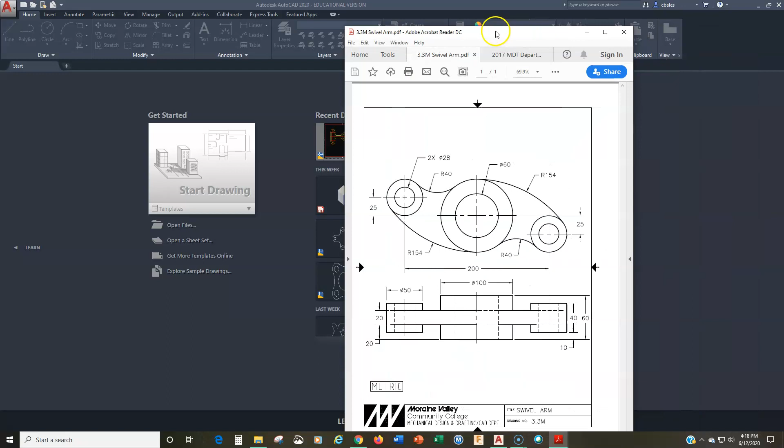Again, like the adjustable fork, we're not so much talking about a much more difficult drawing, but we're extending our capabilities with the tool set that we have. So a smattering of new commands, new techniques here.

You'll first notice that this is our first foray into an orthographic drawing. That is to say, we have two views of a single object. We have a top view, this business right here, and we have a front view, this right here. We also have some additional line types, which we're going to use layers to draw. We have hidden line types in addition to our center lines, which we looked at with the adjustable fork. Everything else is going to be pretty much routine.

I'll talk you through some of the things that you need to be prepared for in terms of creating an orthographic drawing. This is not your last orthographic drawing. In fact, all of Module 3 is all orthographic drawings because orthographic drawings are ubiquitous in engineering drawings, civil engineering drawings, architectural drawings. Just about any drawings that you're going to do in AutoCAD are going to be orthographic.

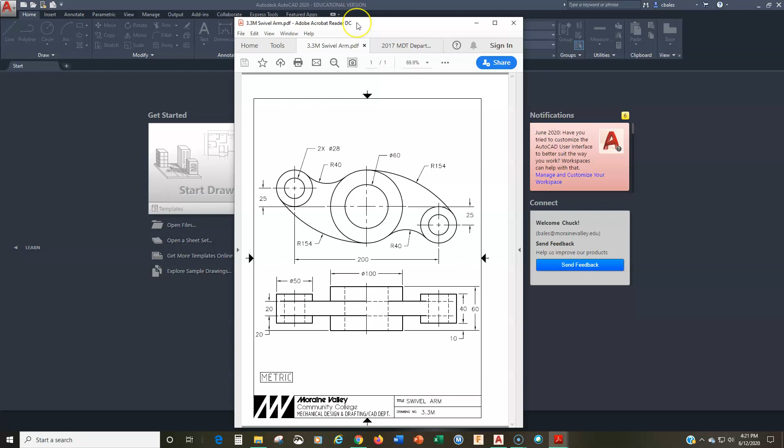Okay, so let's get into this. All right, so there's our drawing. While you're watching this, if you want to pull the drawing up, please go ahead. We're going to get started with a template again, but note this is a metric drawing, so we want to make sure that you use the metric template. All right, there we go.

So we start with the metric template. And you'll notice that down at the bottom we have a different set of layouts, right? In place of the ANSI A, ANSI B, ANSI C, now we have ISO A4, ISO A3, ISO A2. This is just the metric or European equivalent to the ANSI A, B, C, D, E. In Europe they use a different numbering or coding system for paper sizes. We'll cover all that when we get to the printing and plotting stuff.

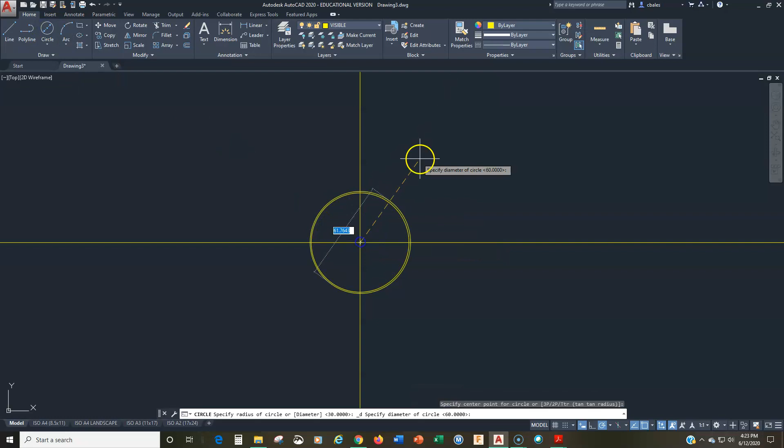So let's go ahead and get this drawing started. And I'm going to start with the construction line because, heck, it just is so perfect. I'll put that in there, just like that, hit escape. And now I want to put the main circle in there. So I'll use center diameter. We'll go like this, and we'll do a 60 diameter. Whoops, I got to zoom out a little bit. And we'll do another one with a diameter of 100. All right, so there's our main circles, main top view of the cylinder.

Some people ask, hey, which view do you get started on when you start drawing? Well, you know what? Whichever view you want to get started, it really doesn't matter. And you don't necessarily have to finish one view and then move on to the next. So you kind of have to work with the dimensions or work with the design, and just get it done.

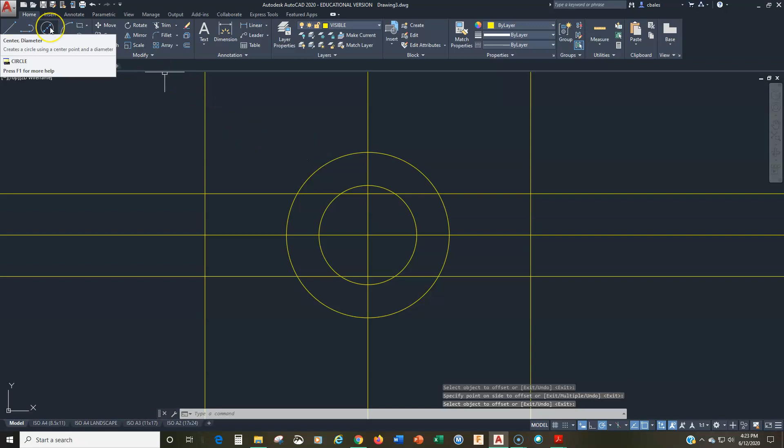I'm going to go back to the offset command, and I'm going to offset 100. I'm going to offset this line over here and this line over here, and then I'll offset 25, and then this will give us the next little bit, which is a diameter 50 and diameter 28. So we'll put a diameter of 50, spacebar, pick, spacebar, pick, and a diameter. Remember, now here's where you can get messed up. So I want to now type in 28, right? Because I'm doing the diameter 28 circle.

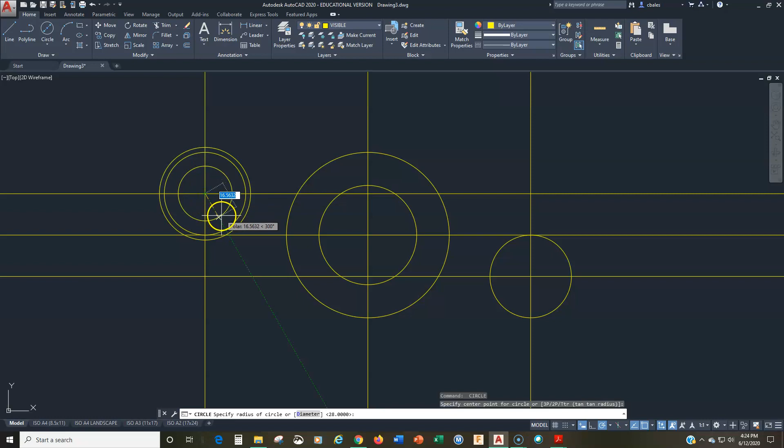What happened there? Well, what happened was I forgot that when I do the spacebar pick, it goes back to the center radius. So I typed in 28 thinking that it was the diameter, but it was asking for a radius.

Okay, so don't get caught. Oh, now I got to figure out which one it is. That's the one, it's too close to the other one. So just remember, if you do this spacebar pick spacebar kind of thing, if you're changing the diameter, you got to understand it's going to switch back to the radius option.

So now I'll ask you, how do you think we're going to get these curves in there? Let's see, we know the radius, right, and we don't know the center of any of these. So we know the radius, we don't know the center. Oh, but look, it's tangent there, and it's tangent here. So it's a tan radius, all right?

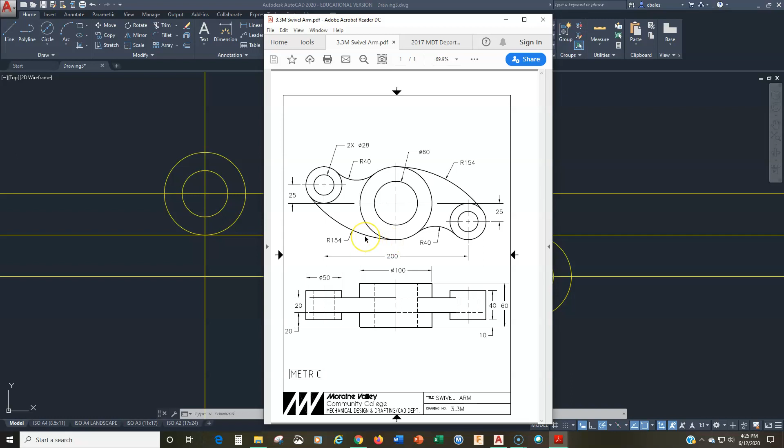So every once in a while when we're working on this drawing, somebody will get a little messed up because they choose the wrong points for tangency. Remember when we discussed the circle TTR option, I mentioned that you don't have to pick the exact tangency. You don't really know it at this point, but you need to pick in the ballpark.

So if I come over here and pick this and pick this and type in a radius of 154, it's going to curve it the opposite way. Why? Because I picked this quadrant of the circle, 1, 2, 3, 4, the fourth quadrant, when really the tangent is more over in the third quadrant.

Okay, so if you get a circle that flips on you here, don't worry about it. Just erase it, go back, and ballpark it a little bit better. All right, let's try that again. So I got to pick over here, and I got to pick over here, 154. There we go.

And let's do that again, circle TTR. So we'll pick over here, and we'll pick over here, 154. And we'll just keep doing it, here and here, 40. This gets a little bit confusing.

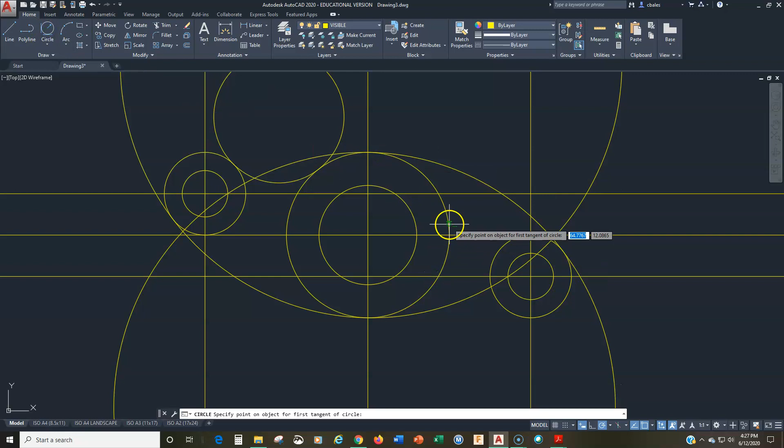So feel free to not put all 4 circles in there. Feel free to put 2 of them in there and then trim it, or even 1 in there and then trim it out and then do the other ones.

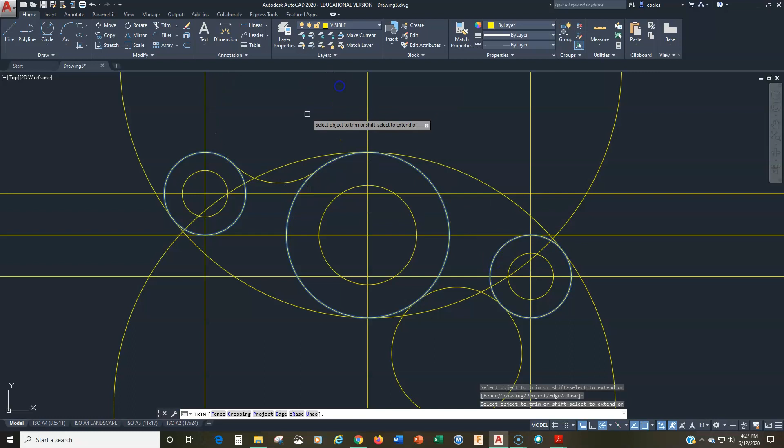So trim, I'm going to pick this circle, these 3 circles, and do some surgery there. I'm going to have to pick again, so let me erase these lines too, they're kind of in the way. And let's finish our trim.

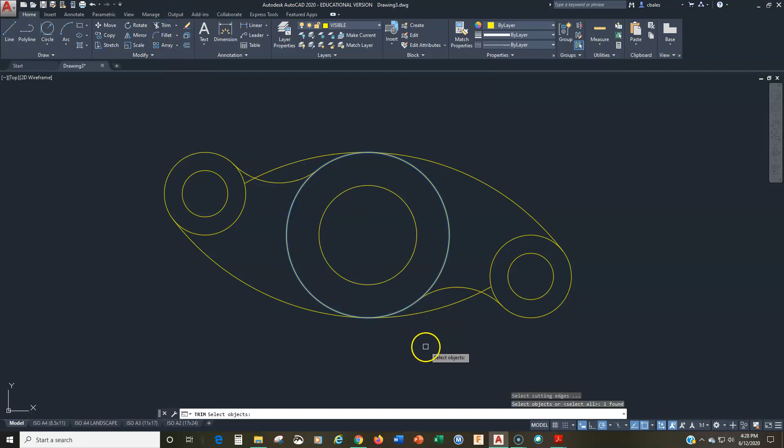There we go, awesome. All right, now at this point, I basically can go one of two ways. I can put in my center marks and center lines, or I can go ahead and finish, get started on the front view.

I think here we don't have to draw center marks right away because we can use object snap center, right? So object snap and center is on, and that's going to help me grab hold of the exact centers of circles. Okay, so let's get started on our front view.

Now sometimes what I like to do, because I like to work with a large drawing here, I will create an orthographic view that's really too close to the other views, just because I'm able to keep the size maximized, and then I'll move it. I'll do that because that'll give me an opportunity to show you the move command also.

Alrighty, so where are we going to get started? Let's draw a line, and we're also going to look at object snap tracking, or OSnap tracking. So let's see how. I'm going to go to the line command, and I'm going to pick up the center, and I'm going to come over here, and I'm going to draw straight down, and I'm going to draw across, right? And I'm going to come up.

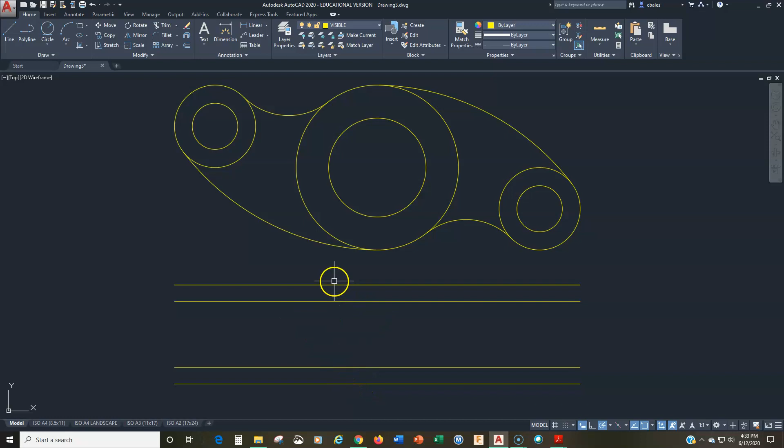All right, so we got that in there. Now I'm going to do some offsetting. So I'm going to offset 60 first, and this is the height of the large cylinder here. And I'm going to go back to offset, and offset 10. All right, hit enter or spacebar to get out of the command. Go back to the command, and I'm going to type in 40 for my new offset, and there we go. All right, so now you can see the top line here and here - those represent the bottom and top of this cylinder, and these two middle lines represent the bottom and top of these smaller cylinders on the wings.

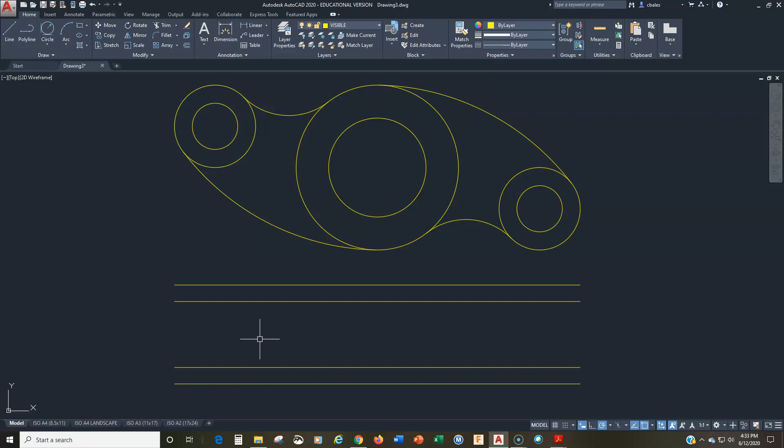So now let's get these cylinders framed in here. We can go to the line command, and I'm going to work just from left to right. I'm going to get this in there, right there. Go back to the line command, hit spacebar, and draw this one right there. The diameter of these cylinders is 50, so I can go to offset, offset 50, and offset this in and offset that in. And now let's trim - pick everything on the screen and get rid of those.

Alright, now why don't we do this? We'll use offset object snap tracking again, or OSNAP tracking again. By the way, I've said this numerous times - I'm not necessarily drawing in the fastest, most efficient manner. I'm drawing so that I can show you the most techniques. So you may have a much better way to draw, and I encourage you to strategize about that and see if you can figure out a way, or do it this slow way like I'm doing. Not that I'm doing it very slowly, but all right.

So let's do object snap tracking again. All right, so we want to frame in this cylinder right down here. So why don't we do this - watch. Line. Acquire this point. I'm not clicking. Track down. Now watch, click, click. You see how object snaps came on and really helped me out?

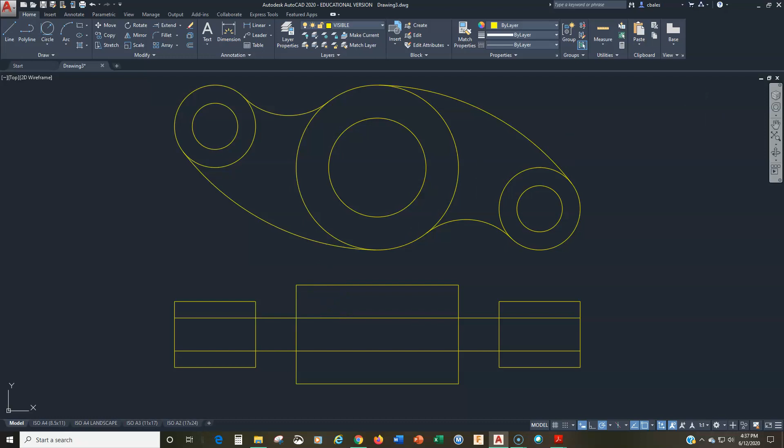All right, now what is going on over here? Okay, so let's take a gander here. This always confuses people, especially if you don't have much experience with orthographic projection.

So if I look right over here, let me see if I can blow this up a little bit. We'll go to like 100. All right.

So look in the top view. You see how this rib comes around here and it blends into the cylinder, right? So what we have is a 20 millimeter thick rib that is just going to blend right into this 40 millimeter tall cylinder.

In the front view, that's what we're seeing. This surface comes and blends right in there. So what happens is at the point of tangency, right about there, that's where this surface blends in with this surface. At that point of tangency, that's what it looks like. This line just ends, signifying that this surface comes in and blends smoothly into the cylinder.

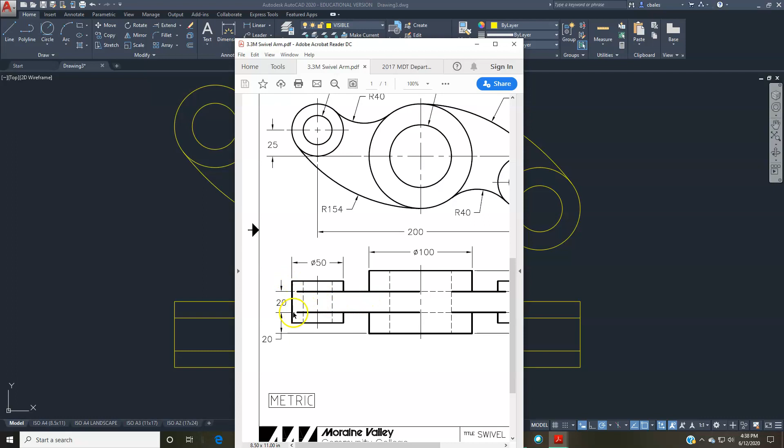So let's make that. All right, so we're going to go to the line, and I'm going to acquire this point. Now notice I get object snap intersection, right? Because that's an intersection between two curves, right?

And I'm going to track down. I'm not clicking, track down. Let's go through that one. Boom and boom. Okay, let's do that again over here.

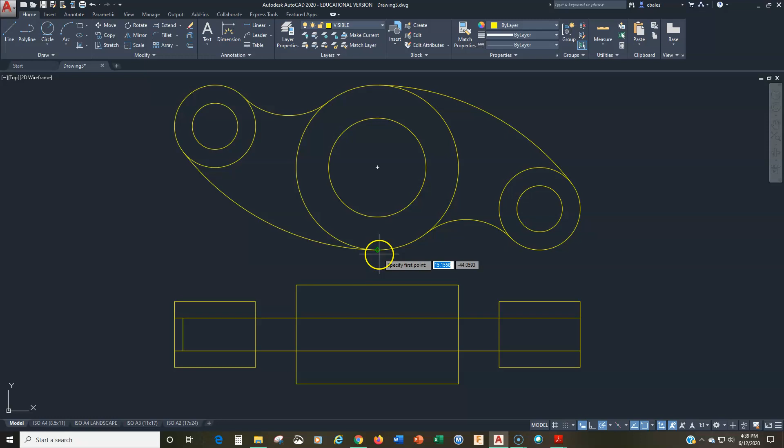Line. Now here's where you got to be careful. Look at that right there. You see what's going on? So this is a heads up here. I'm going to zoom in here. We got two things going on here.

We have the end point of this curve, right, and that's the end point or intersection. But then right here we have a quadrant. Ay, Dios mío. So we have the quadrant, in this case the 6 o'clock position on this diameter 100 circle, that's the cylinder, and not just a smidgen off is the intersection that we're looking for.

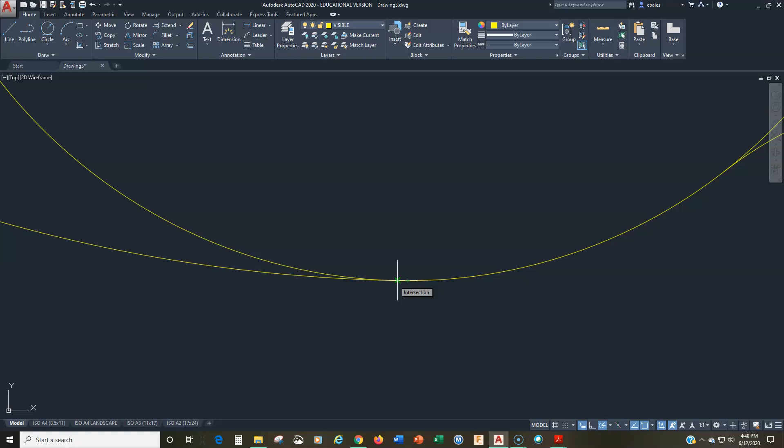Be careful with this, all right. I will be looking for this in your drawings, that you got this properly. Okay, so let me just zoom in here and let me just make sure I get the right points, right? Not the quadrant. If you're at all worried that you might pick up the quadrant, here's what you do.

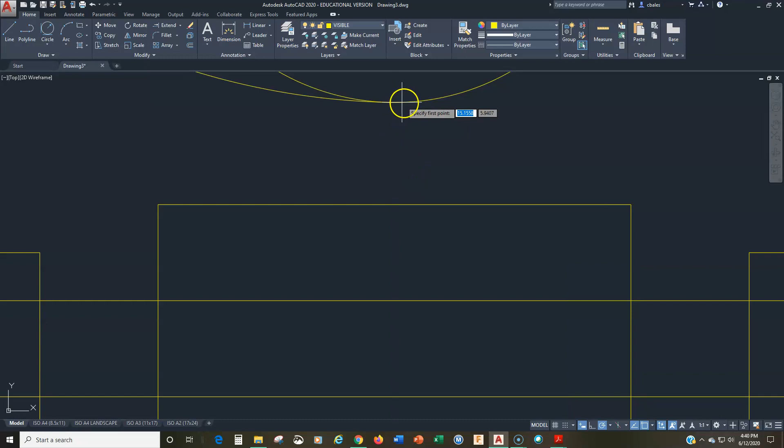Go down to Object Snap, turn off quadrant. And now you can't get the quadrant, okay? So I'm going to come down here, acquire, boom, and click, boom. Okay, so you got to be on your toes for some of these object snaps, and that's exactly why we don't just turn every object snap on. Okay, we just don't do that.

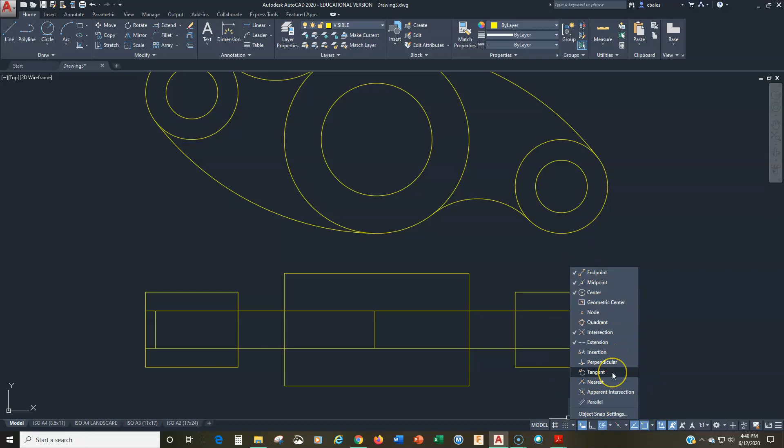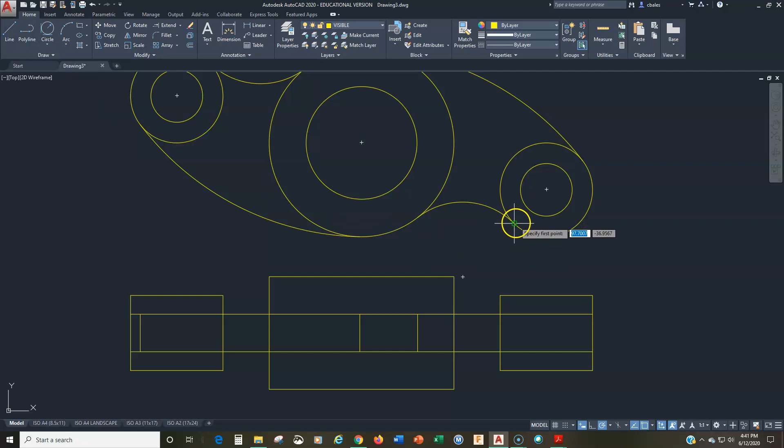So let's finish this up. We got this one right here. There it is right there. So we track down, click, click, and then one more. Click, click. Okay, and now we can trim.

Let's trim. Where's trim? Trim, trim, trim. There we go, trim. And I'll just pick everything on the screen and we'll trim that. We want to trim that. And we want to trim that. Okay, oh, and let's go back to trim. Let's pick everything on the screen.

We need to get rid of these lines too. Okay, and we need to get rid of, these are kind of our construction lines, so we need to get rid of those too. So I'll erase those. All right, so far so good.

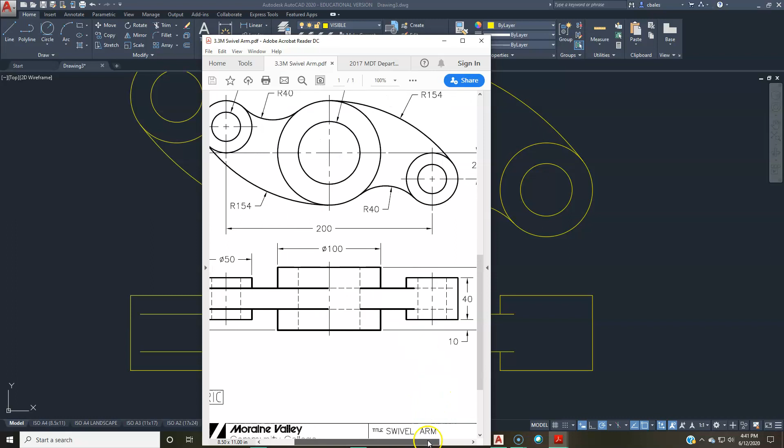But we're not really done here. What the heck? What are those hidden lines for right there? All right, so we have hidden lines back behind here. Oh, and we have some over here too. What could those be for? Well...

Behind this surface right here, behind these surfaces I should say, this rib continues past that. So the rib doesn't stop right there. The rib continues past in the back.

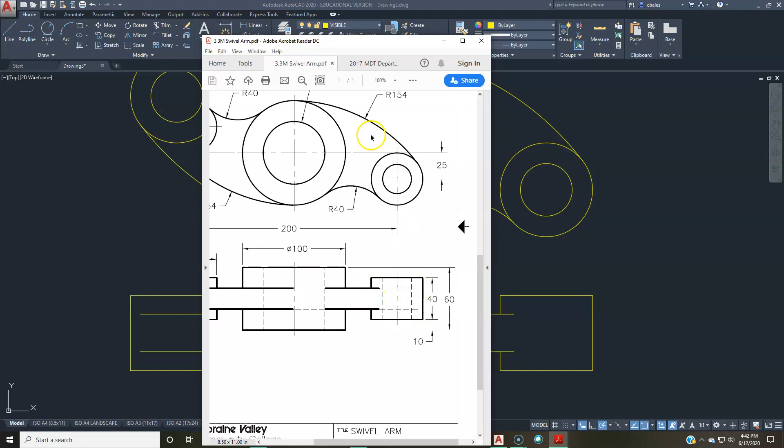So this hidden line and this hidden line are the top and bottom surface of the back of the rib, behind the cylinder. Oh man, look at all that stuff.

So we're really ready to draw all the hidden lines now. Let's take care of that. First, to draw on a new layer, we come up to our layer drop down and choose the new layer. I want to draw on the hidden layer, so I pick hidden. That changes the current layer to hidden, so now every line and every circle I draw is going to be hidden, just like I want.

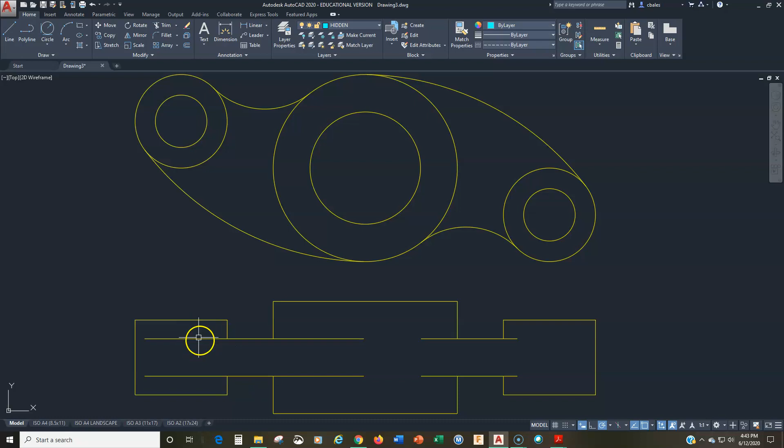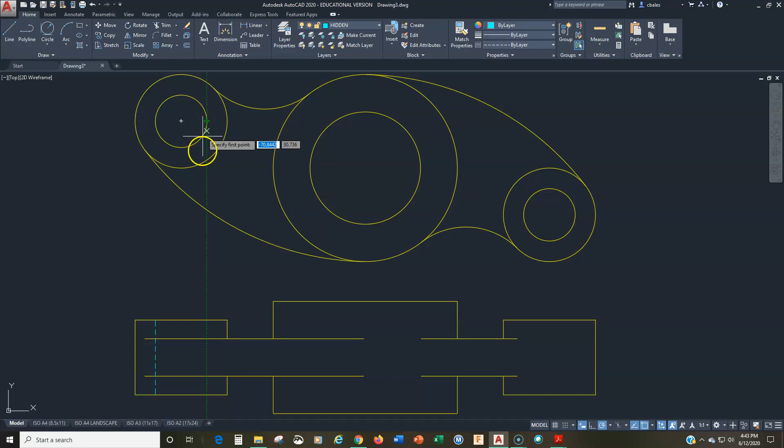Okay, let's get these holes drawn in the front view. I'm going to turn back on Object Snap Quadrant, because I'm going to use that again. I'll go to the line command, pick up this quadrant. I'm not clicking, I'm going to track down, click, click. Go back to line, acquire, click, click. Go back to line, acquire, click, click.

I'm hitting the spacebar with my thumb, by the way, so I can maximize my efficiency. My mouse hand, my right hand, is occupied with the mouse. My left hand is occupied basically with the spacebar.

Excellent. All right, let's get these finished now. I'm going to turn off quadrant again because I know it's going to get in the way. I'll go up to the line command and pick that point. Look at that right there. There's only one endpoint there because I turned off quadrant, and I'm going to track down here, click, click.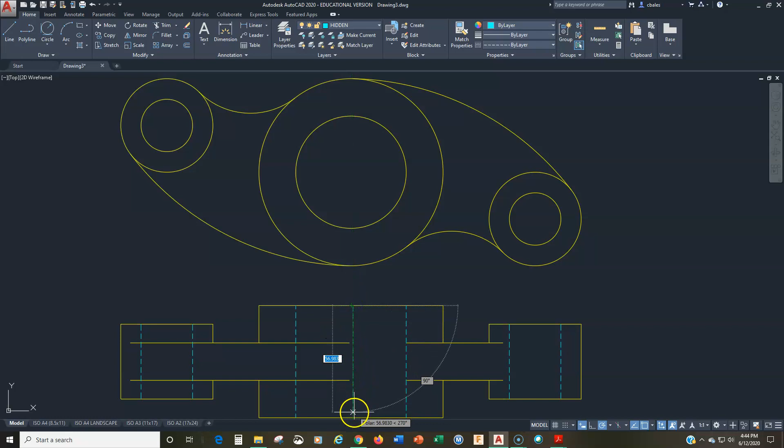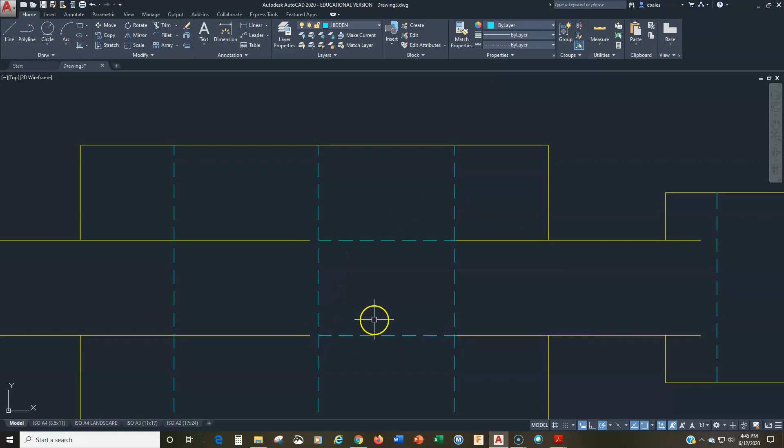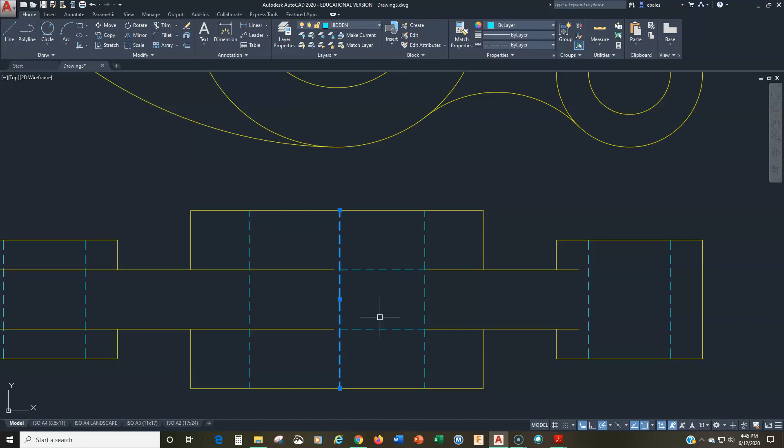All right, what did I do that for? Well, because I need to draw a line from the endpoint here, perpendicular to that, or at that intersection, from the endpoint here. Now, this is not a trivial thing to see, especially for those of you that don't have a lot of experience with orthographic projection. That's why I'm telling you what it is. I want you to be able to see this and understand where it's coming from and how to create that. So I'm going to pick that line and delete it because that was just a construction line.

Let's finish up over here. We'll go to the line command, grab this endpoint, track down, click, click. Now you might be thinking, well, can't we do extend? Why can't we do extend? Click that, hit enter, and extend right there. Well, yeah, we can, but guess what - it's going to extend it with a visible line. That's not what we want.

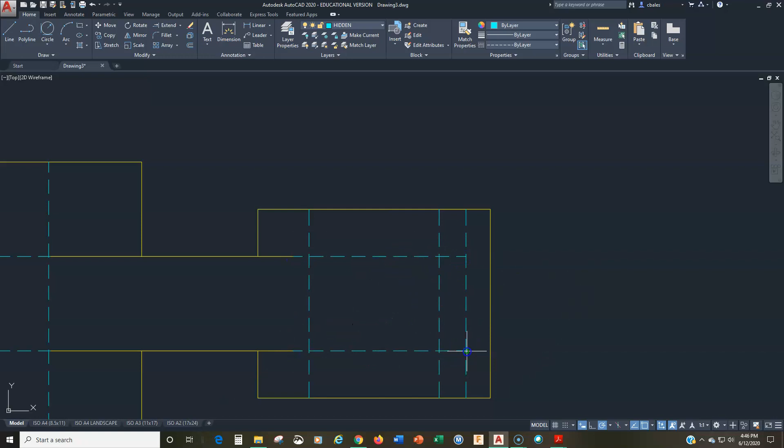So let's undo that. Let's go back to the line command, and let's grab the line and draw it from here to here, and from here to here. And then we can erase our construction line and zoom extents. All right, so far so good.

All right, so that's it. Now we just got to add our center lines and center marks, and we'll separate these views. They're a little too close together, but we'll separate them later after we get them in there. Remember, with the center mark and center line command, it automatically puts it on the correct layer, so we do not need to change the layer to the center layer.

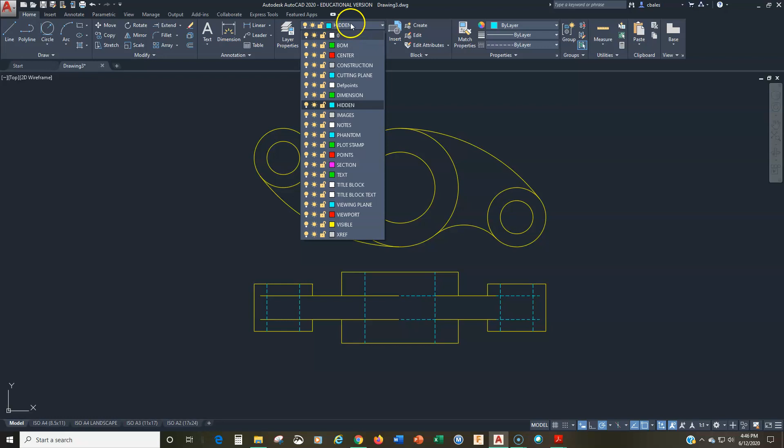Okay, so I go up to annotate and center mark, and we want to pick the outermost circle. Oh, look at that, showed me wrong. All right, what does that mean? That means the metric template is not the same as the inch template. So let's go and fix that.

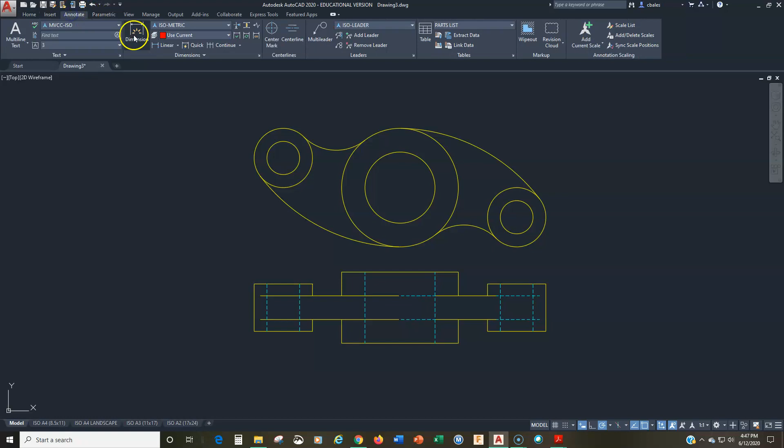Let's go and change this to the center layer. Go back to annotate, center mark, one, two, three. Okay. We don't need to extend these at all, so they're perfect the way they are. Then we can go to center line, and we go between this line right there. Now, why did that do it so short? Because this one was short.

How can we fix that? Let's undo that. How can we fix that? By choosing this line and this line. Beautiful. So don't choose this, choose this and this - it's the same center.

This and this, and there we go. All right, so now we're ready to print. We'll space these out once we get the view set up.

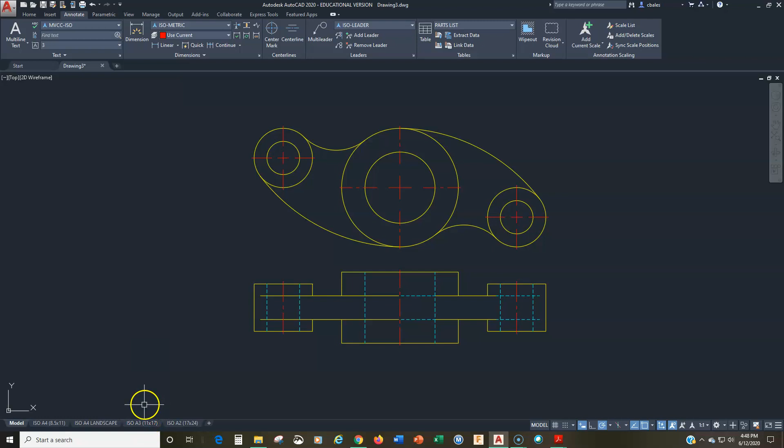We want to print this on an A3 border, 11 by 17 inches. I forget what it is in millimeters, but A3 is what we want. We're going to click on the A3 border right there, and hey, we get to see a little view of it, right?

Just by chance it's aligned in there, but we still want to go through our protocol for getting this set up, remember from the adjustable fork drawing. We double click inside here, or click on paper, and change it to floating model.

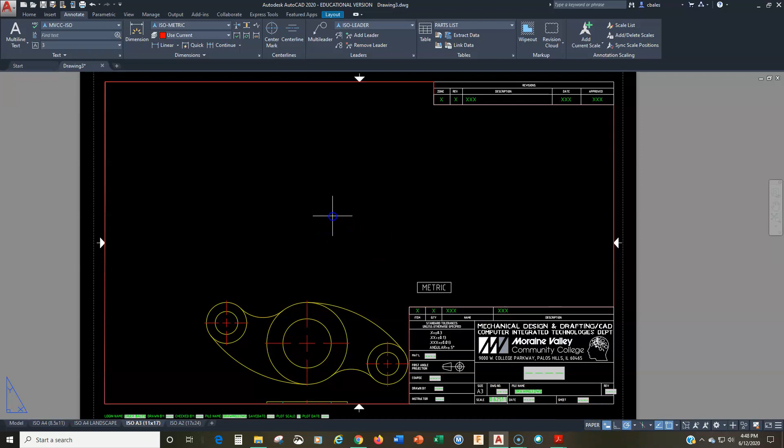Now I can go and do a Z space, E space, and bring that in there. Okay, now I want to adjust the scale. So we're at 1 to 1.315446. Let's try 1 to 1.

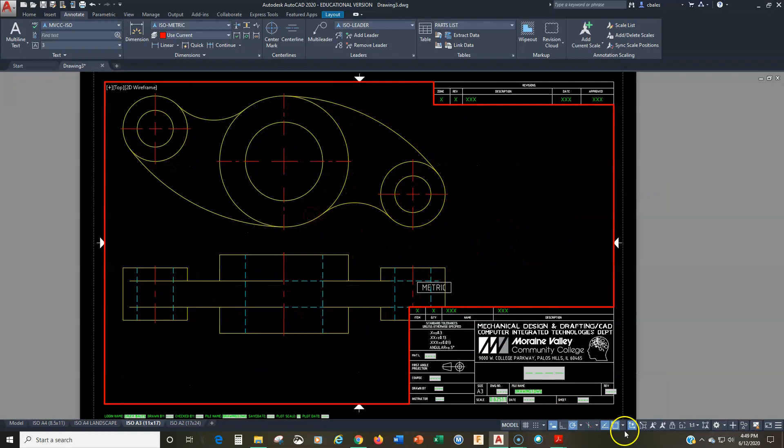Yeah, that's not going to work. So let's go to 1 to 2. There we go. I'll move that a little bit over there, kind of bias it away from the title block and border.

Now we can lock it, we should lock it. Lock. And now, because I want to show you, we're actually in model space, so we can manipulate, draw, do anything we want in here.

It's not typical that you do it, but in this case I want to move these views apart, spacing them out with the title block in my view, since that's what I'm basing this move on. So I'm going to go to the home command, home ribbon.

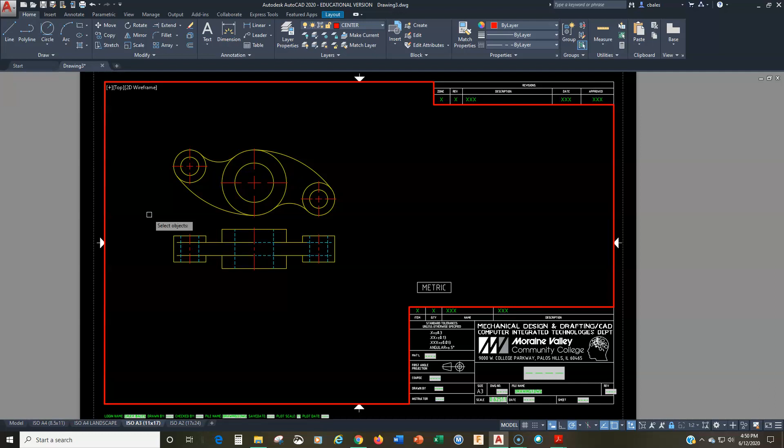I'm going to go to move, and it's asking me to select objects. How do I select objects? Well, gee whiz, I gave you a whole cheat sheet with that. So I'm just going to click right here and use a window. Click, and now I'm done selecting objects, so I'll hit the Enter key and specify a base point.

Here, all we want to do is move this relative to where it is. Watch, I don't need to pick an exact point, I'm just going to pick out in space here. Watch, see how it moves with that, right?

So now, since my cursor is kind of out of the way and not obstructing my view, I can move this apart. That looks pretty good right there. Yeah, I think that's good. All right, so that's good.

It's locked, I got everything. If you don't want to do it in floating model space, you can always go back to model space and move them apart, but it's just nicer to see this.

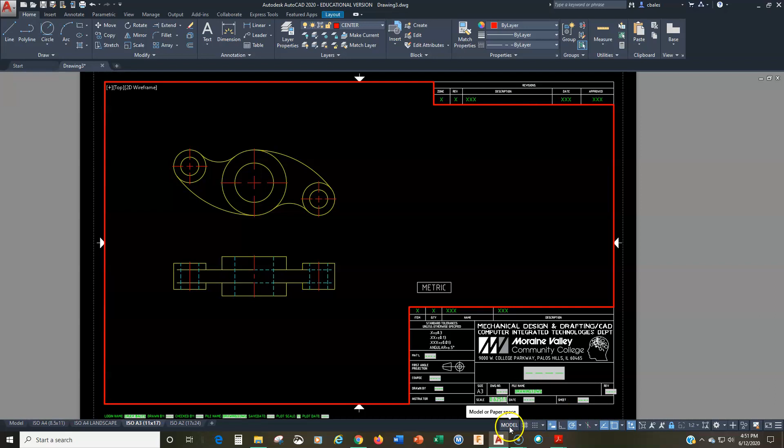Now I want to close my viewport, so I double click outside, or click on model down here, and change it to paper. Now I've closed my viewport, and I want to go in here and start entering the values for the title block.

So I go to drawing properties and drawn by, all caps, instructor C Bales, course MDT 145 300, drawing title, this is called the Swivel Arm, drawing number 3.3M, revision number 0, sheet number 1, material not applicable.

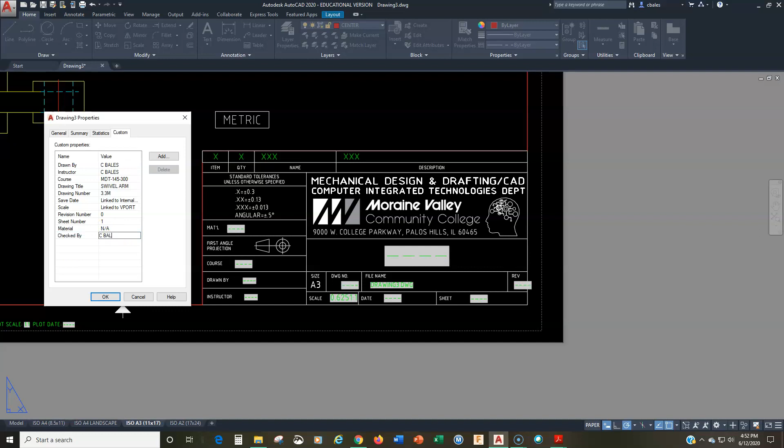I don't think they give us a... nope, they don't give it to us. Check by C Bales. Okay, nothing shows up? Right, because you have to regenerate your drawing. RE, enter. There we go. All right, very good, very good.

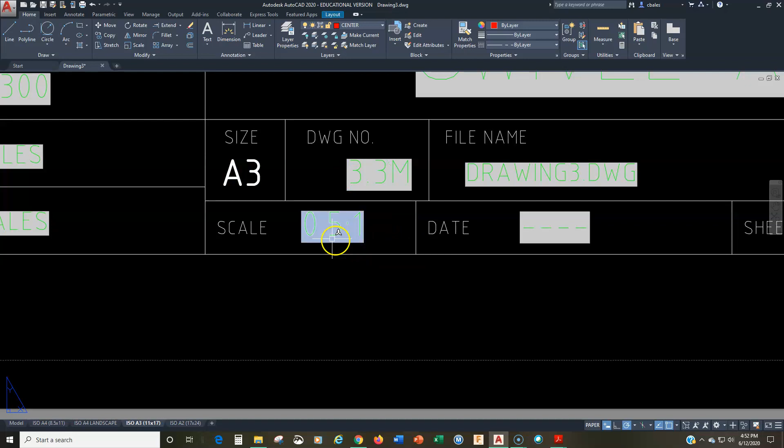Notice that for some strange reason AutoCAD does this, and we can't get it to flip. I'm not even sure you can, but we use a scale of 1 to 2 and it comes out 0.5 to 1, or excuse me, a scale of 1/2. Well, 0.5 to 1 is 1/2, right? Remember your fractions. Okay, so it looks good.

Everything's good to go, beautiful. We'll save it. Yikes, I forgot to save it again. So again, do as I say, not as I do.

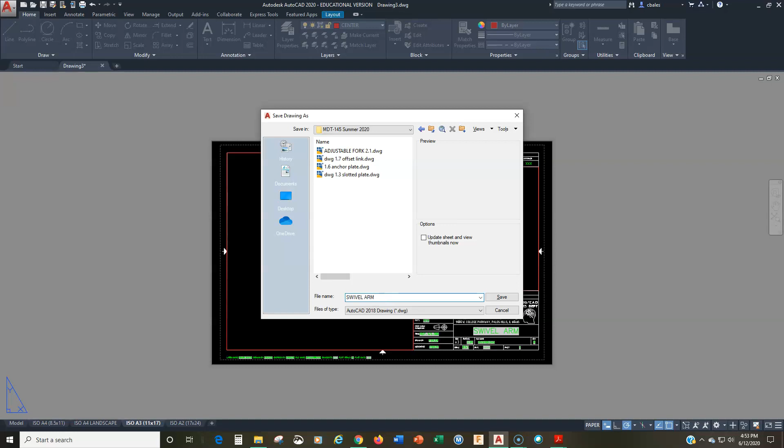MDT department, 145, and drawing swivel arm 3.3, enter, and yeah, it gets put in there, right there.

And we go save, and let's go to plot. So we go plot, ACAD PDF, ANSI-B, no, we want ISO A3, where is it? Right there.

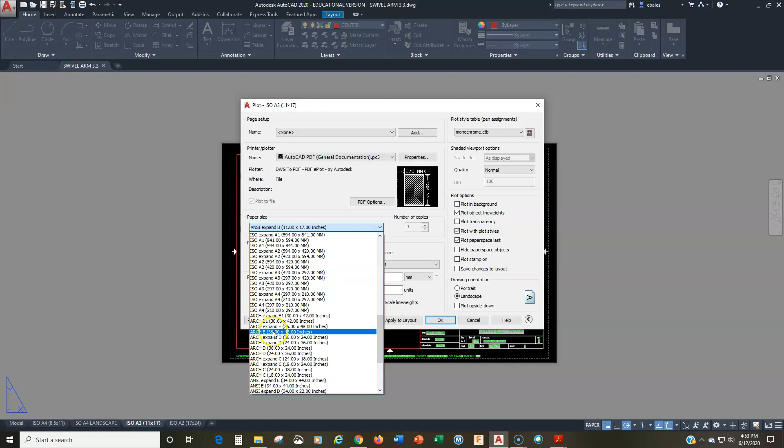Layout, plot, preview. Beautiful, you can really see the line weight thicknesses here. Everything looks excellent. Right click, plot, create our plot file. It's good.

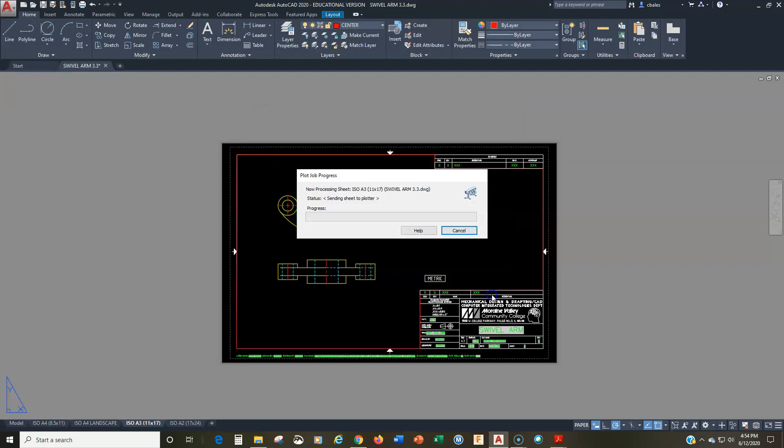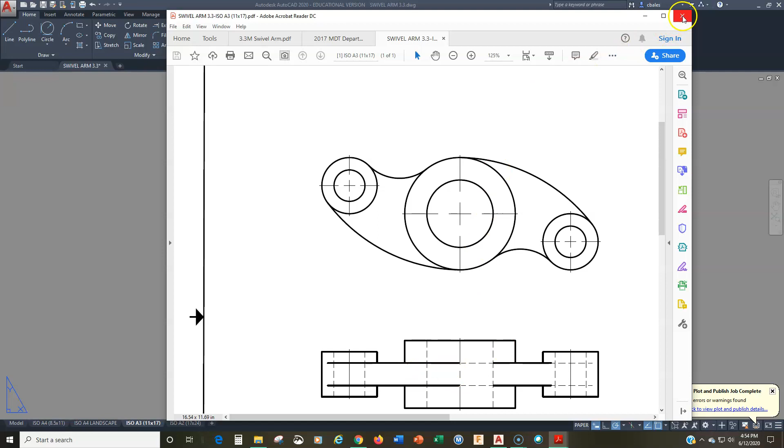And the fruits of our labor. Whoops. All right, can I zoom in a little bit here? Yeah, all right, so you can see line weight is good.